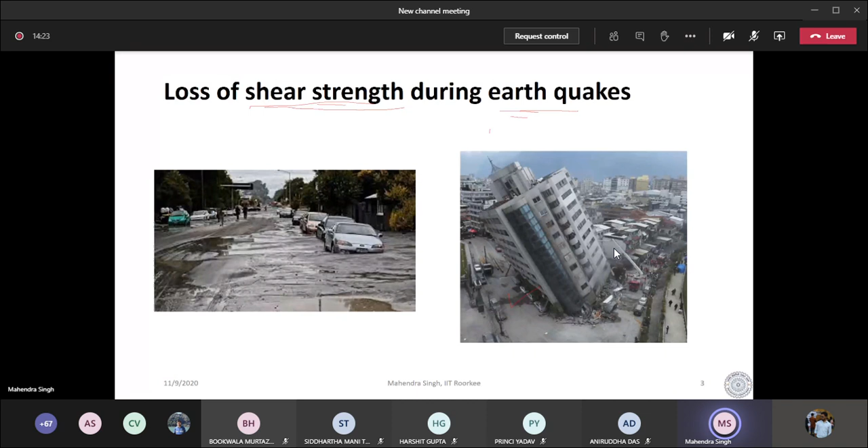So the maximum amount of resistance which the soil can offer, that will be shear resistance, shear strength, and it's important to find out what the shear strength is, or what happens if there is something which causes a decrease in shear strength. For example, when earthquakes are there, which we will discuss later on, the shear strength reduces. Why it reduces, we'll discuss, but that results in these kinds of things, because the strength reduces, it offers less resistance, and the mass is going to fail.

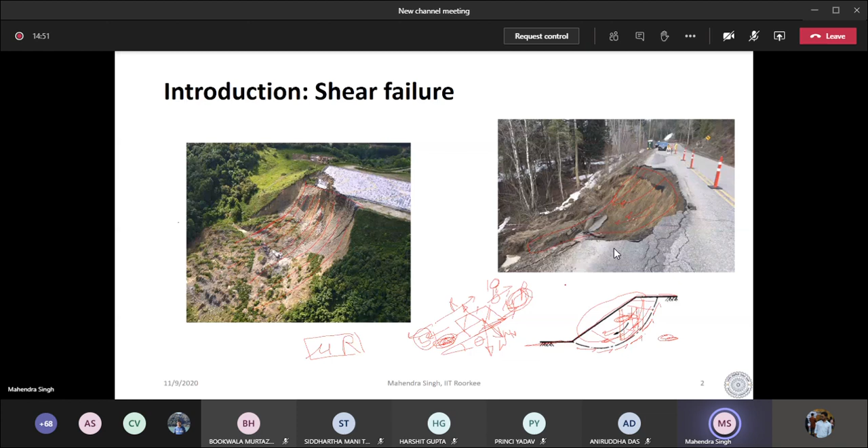So here I'm making a statement that soil generally fails in shear. I have taken some examples; I have already given you this example. Let me go back to the slope stability analysis. Here it is failing in shear. Here also it is failing in shear. Here also it is failing in shear. So whenever you talk about the stability of the soil, you will be talking about the shear strength. Even if you load the soil mass in compression, it is going to fail in shear only.

I have shown you here some specimens from the laboratory test, and when the load was applied on this soil specimen, the failure was in this direction. So it is due to shear. You can resolve the forces. You can find out how much normal stress was acting on it, how much tangential stress was acting on it, and you can do that mechanics. Here is another example. There is a shear plane. So soil fails in shear.

This is a foundation example I have taken. This is a foundation, earlier it was vertical, so it was applying load, and then it tries to fail, and the soil mass tries to move in this direction, and the soil is going to bulge. And this thing I have been discussing, that soil is a discrete medium. It's not like steel, it is not like concrete.

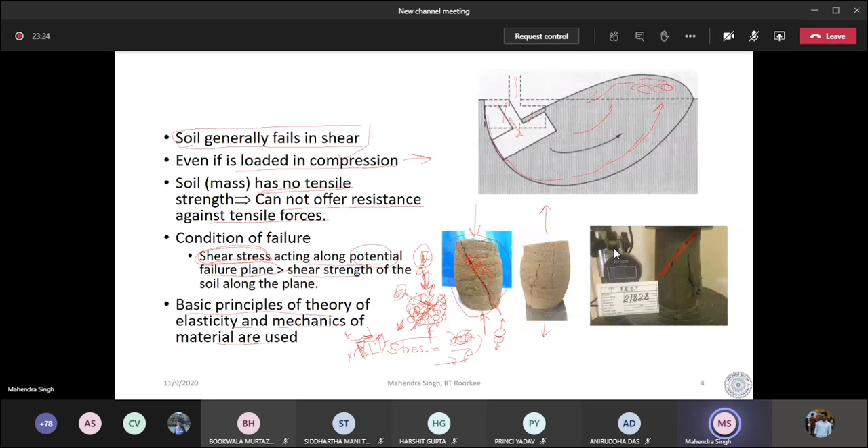You have seen it in the previous chapter when we were discussing consolidation. At the end, when you remove the entire load and do the unloading in the consolidation test apparatus, there will be expansion of the soil mass, and that expansion is very low compared to the compression.

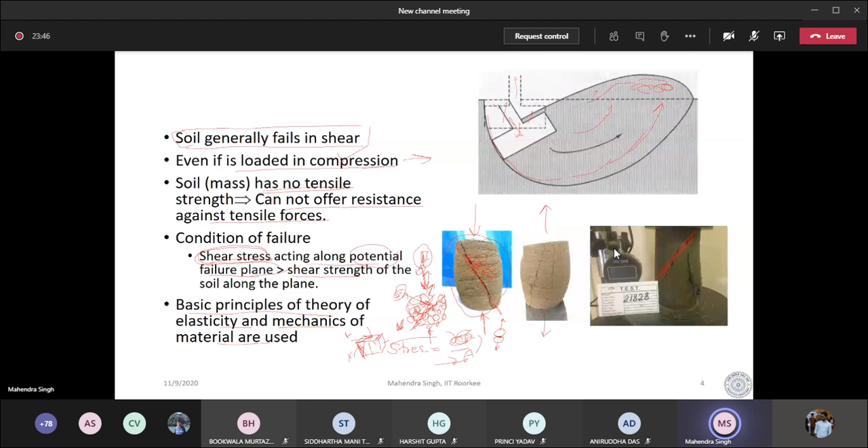So it's not perfectly elastic material, that we should remember, though we will be using the theories. Now, some refreshing of your basic mechanics principles. So maybe today I'll be focusing on this only.

And remember the convention, contrary to what you might have done in your steel courses or other courses. In our case, in geotechnical engineering, because the soil cannot take tensile stresses, it can take only compressive stresses. So it is customary that we generally consider compressive stresses as positive. So maybe I will not be telling you again and again, but you have to remember it. If I am saying there is a confining pressure of 50 kPa, it is understood that what I mean is 50 kPa compressive. So please remember it.

And in your second year course, I think you might have studied in detail how you can find out shear and normal stresses on any inclined plane. Suppose there is a three-dimensional body, and in x direction stress is sigma x, sigma y here, sigma z here, and there are also shear stresses acting here. You can resolve these stresses, and you can find out on any oblique plane what is the normal stress at that particular plane and what is the shear stress. So these things you might have done.

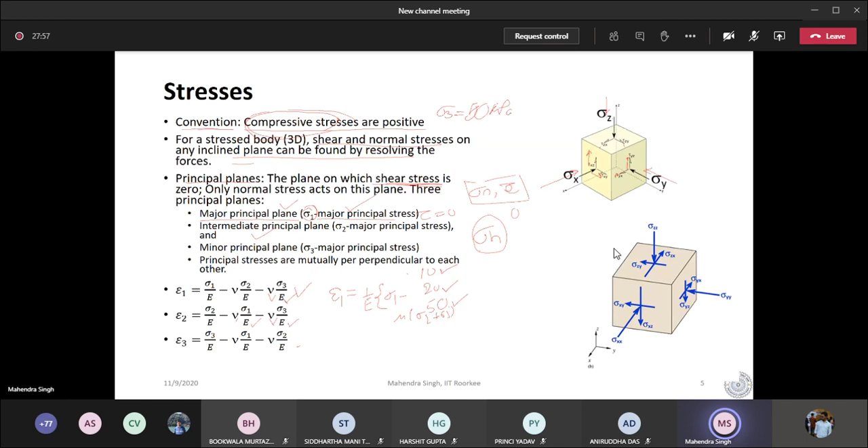And also from your basics, you know that if I want to know strain in any direction, epsilon 1 will be equal to 1 upon E times sigma 1 minus nu times sigma 2 plus sigma 3. I have given this equation. So these expressions are already known to you. Nu here is Poisson's ratio, and E is modulus of elasticity, keeping in mind that they are not strictly applicable, but we still use them for the sake of simplicity. And results are approximate, that should be in our mind. As far as your course is concerned, you can very comfortably apply these equations. So we should be able to find out these stresses, and I'm not going to derive these expressions.

We have taken a 2D general case where sigma x is acting in horizontal direction, sigma y is acting in vertical direction, and let us say the shear stresses are also acting. This shear stress and this shear stress magnitude will be the same. For this case, the principal stresses will be given by this expression, half of. I hope you can derive these equations; in your strength of materials course you have derived these. So the major principal stress and minor principal stress are given by this expression, and tau max is given by this expression. It's very easy to use what is called the Mohr circle, and I hope the basic theory of Mohr circle is known to you.

On the x-axis, we plot sigma. I prefer to write sigma n always here, and on the y-axis we put tau, and then the Mohr circle is a circle. You can mathematically prove that every point on this circle represents the stress state. When I say stress state, if I take this point, the x coordinate and y coordinate of this point represent the normal stress and shear stress on a particular plane in this body. This you have done in your second year SOM course, I think.

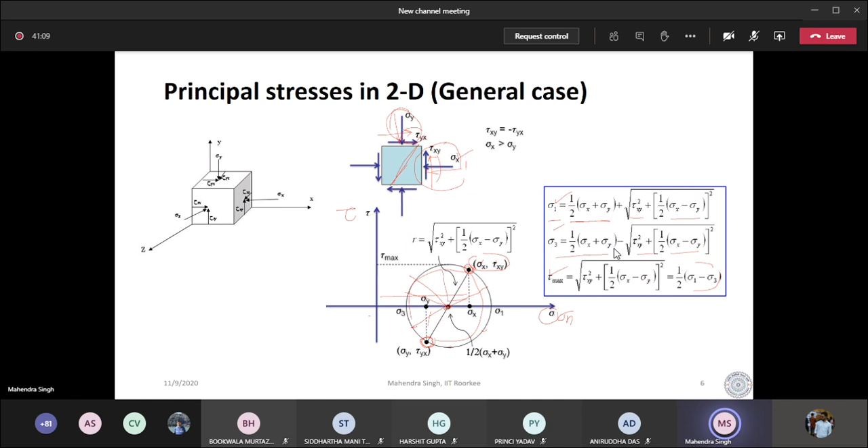We can give you this problem in the exam, to plot this Mohr circle, and then we join the points, get the center, then the radius, and then draw the circle. The same thing I'm going to do here. So this is one point, this is another point. I join them, get the center, the radius, and draw this circle.

And any point on this circle is going to represent a stress state. So let us say I want to know the stress state at an angle theta; please remember what our convention is. From the plane on which sigma 1 is acting, I'm taking angle theta. So when you have to correspond with this figure, you have to make this theta 2 theta. That is the thing you have to remember. So suppose you want to get it at 30 degrees, here you have to use 60 degrees.

Here we started with the plane where sigma 1 was acting, and here also this is the point which is representing the plane where sigma 1 is acting. We will start from here, and then from here we will plot angle 2 theta. Once I plot angle 2 theta and take this point, theoretically you can check. This value is sigma 1 plus sigma 3 by 2, because this is sigma 1, this is sigma 3, and this value is radius into cos 2 theta, and the radius is sigma 1 minus sigma 3 by 2.

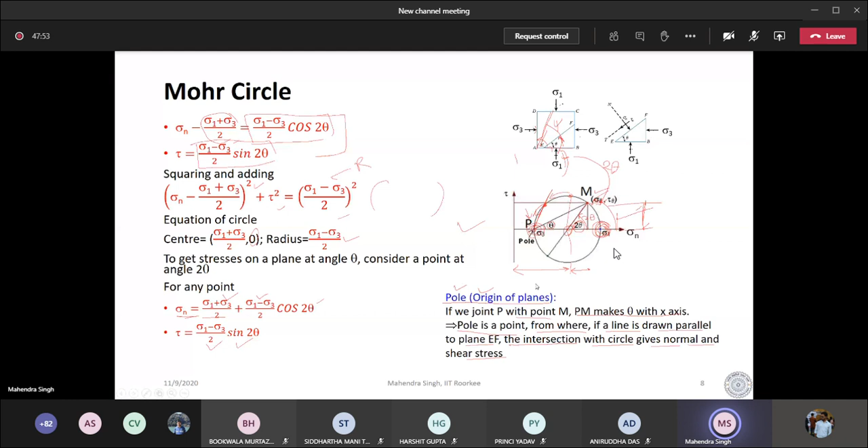You should remember this pole also. So what you have to remember is that it's a point, and from there if you plot a line parallel to any plane, then the intersection of that line with the Mohr circle is going to give you the stresses. We will be using this property later on, so please remember it.

Now, all these things you have already done, so we are now coming to the shear strength of soil. A little bit I am going to discuss today. Soil is a discrete medium, that I have already told you. So let us start with an experiment, and that experiment is called the direct shear test.

You are not here. Had you been here, you would have conducted this test. I would like to spend some time later on. Maybe I'll show you some video clips.

So what I do here is I have filled up this shear box with the soil at that particular density, and I'm assuming that this particular soil is representing the field condition. As it is in the field, it is here. I am discussing at the moment the philosophy. How we actually conduct it, we will discuss later on. So the philosophy is that I am going to apply some normal force, let us say 10 kPa, 20 kPa. One value I am going to apply on the top of this soil sample.

So this is the soil sample. Its dimensions are known to you. It's rectangular, so perpendicular to the plane of the slide, there is some dimension. And you have applied the normal force. As you know, when you apply the normal force, the soil is going to compress, and it has to reach an equilibrium, and I'm assuming that if the water is there, it is freely draining. So water has drained out, or it may be a case where the water might not have squeezed out. That theory you already discussed.

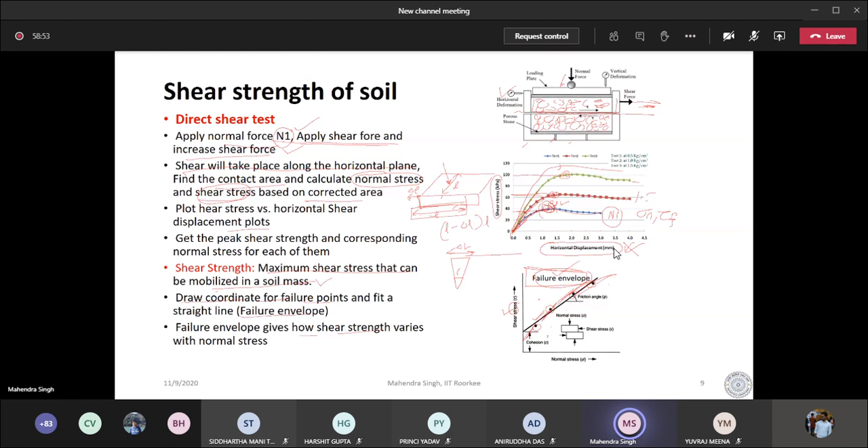Is that clear? So इसमें हम लोग shear strength plot कर रहे हैं. Okay, sir. Any other question? If there is no question, let me... so you can discuss with me what are the problems.